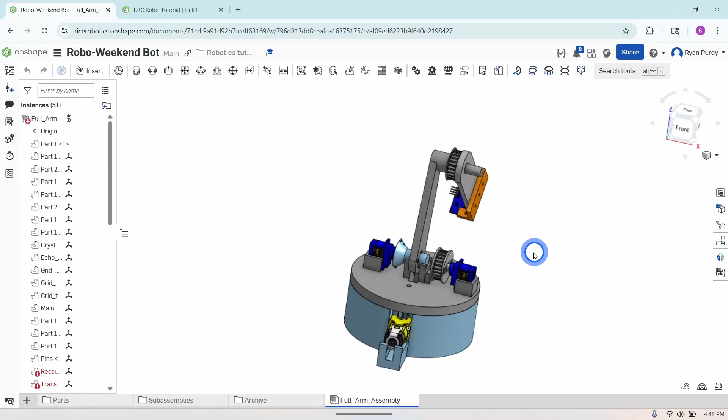So we'll return to our Onshape document, and instead of starting from scratch, we're going to start creating link 2 from the pulley part that we CAD'd earlier. This is because the geometry here is identical. These pulleys have to be the same size to ensure that the rotation is always together between the pulley and the link, so we'll save some time by using the geometry we already created in the pulley part file.

So go to the pulley in the file select, right click, and select duplicate, and this will create a copy of our pulley. Then right click that file to rename it and just call it link 2.

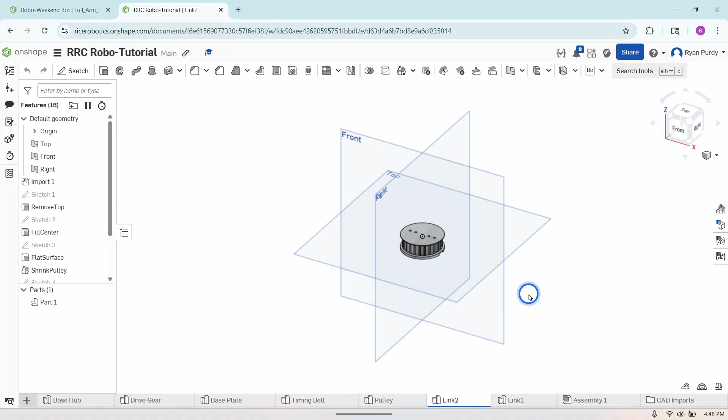So now we have a convenient starting point for our link 2 geometry. There are a few parts we don't need, this servo attachment, for link 2, so we'll need to go into our feature tree and figure out how to get rid of both this servo cutout or servo horn cutout. We also don't need these holes because we won't be mounting this to a servo.

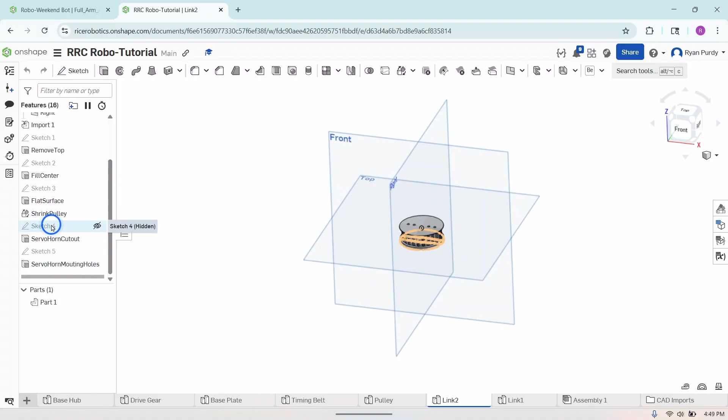Scroll down. Conveniently, we did name our features, so it's very clear to see which ones we need to delete. We need to delete this sketch and the associated feature, which is the horn cutout, and then this sketch and the mounting hole feature. So select all of them, right click, and delete. Now this will be the starting point for our link 2 CAD.

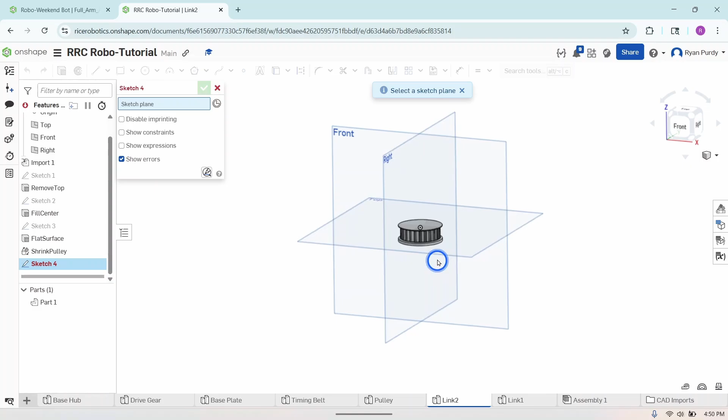Okay, so we'll start adding to this pulley to build our link 2. We're going to start by creating a sketch on the bottom face of this pulley. You'll see one of these faces of the pulley is a little bit thicker, and we'll be doing it on that thicker face. Select that to be the sketch plane, right click, reorient the view.

Now we're going to create some geometry here to make the main body of our second link. You're going to select the Use tool from the toolbar and project this circular edge onto our sketch plane. That will be one part of it, and then the other part's going to be a corner rectangle.

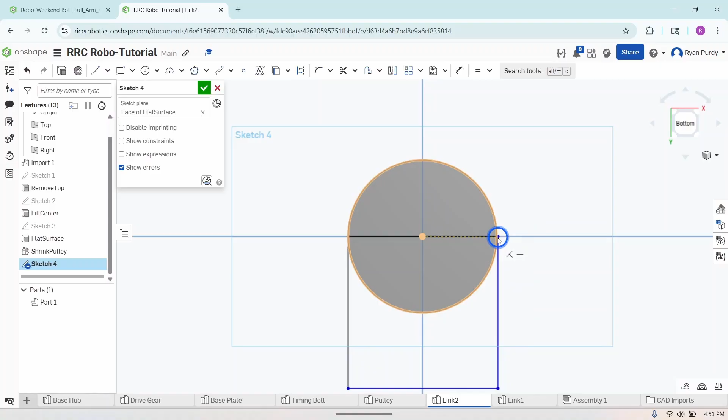Select corner rectangle from the options up here. One of the corners needs to be coincident with the circumference of this circle, and it also needs to be horizontally aligned with the origin. Make sure both of those relations are added. Click to establish the first corner, then drag and place the second corner out here somewhere. Then exit the rectangle tool, and drag this corner so that it is also coincident with the circle. By default, it will be horizontally aligned with the origin.

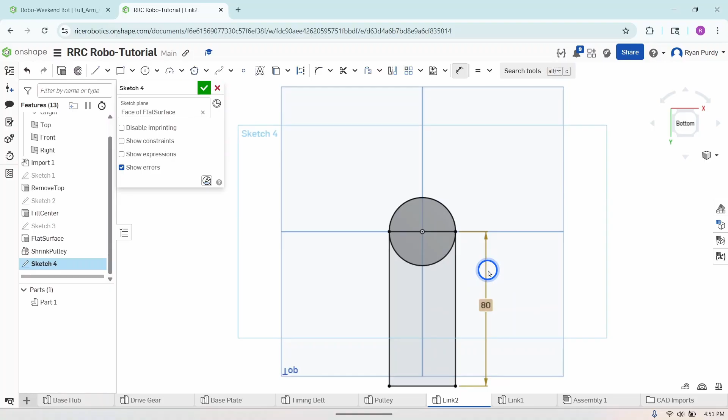That looks good. Now we just need a dimension added to this rectangle so that this line down here will be fully defined. This rectangle needs to be 80 millimeters long, so we'll add a dimension to this edge and say that it will be 80 millimeters. Now this sketch is fully defined. This will form the main body of our second link.

So finalize the sketch, and then we're going to extrude this sketch, adding material 5 millimeters away from the pulley. Specify 5 millimeters, and it adds this body here. That looks right, so hit the green check mark. Go ahead and name that feature.

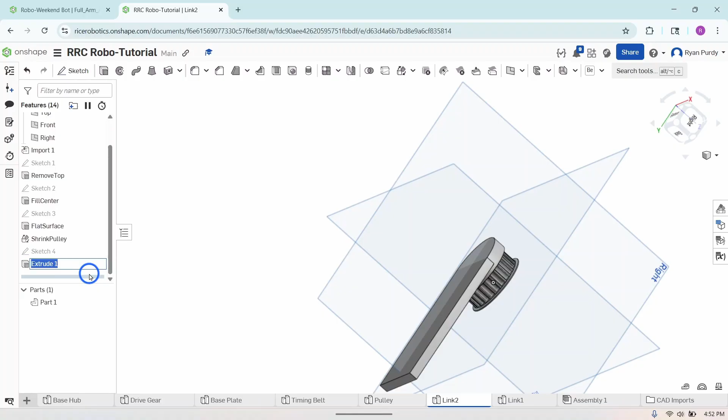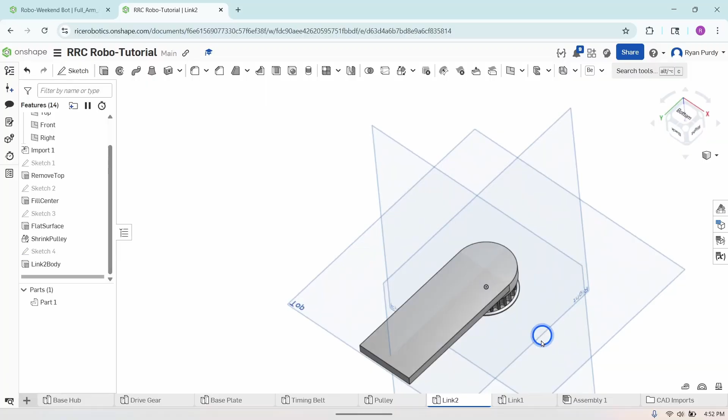Now that we have this main body, we need to add a hole. If you'll remember in link 1, we added a shaft so that link 2 can sit on it and connect to it. So we need to add a hole in link 2 so that it can engage with link 1, a circle that's concentric with this circular edge here and goes all the way through the part.

So we need to create a new sketch on this top plane. Right click to view normal to the sketch plane. We're going to draw a 10 millimeter circle that is concentric with this arc, which in this case just means it's centered at the origin. So draw a circle, use a dimension to specify that its diameter will be 10 millimeters.

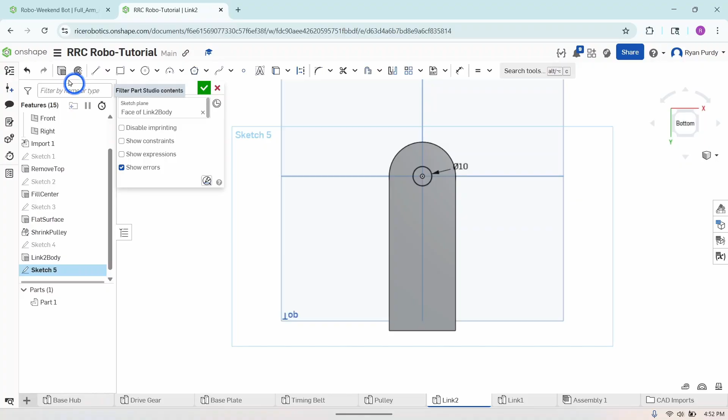Now that's fully defined, and we will extrude it, this time removing material, with a through-all end type because we want to cut through all of the part, both the link 2 body and the pulley itself. Hit the green check mark to finalize that feature. Make sure to name it.

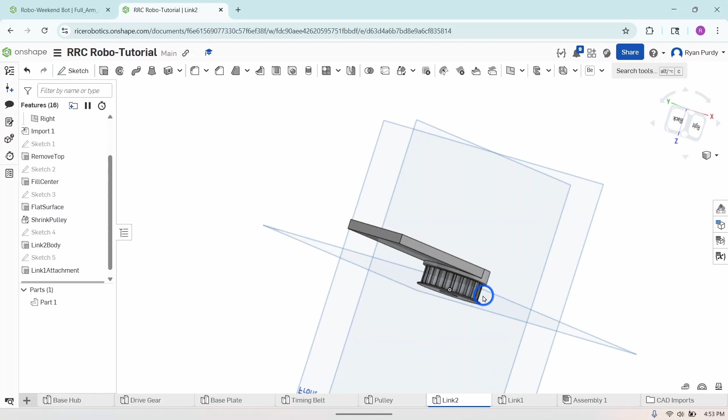So now we only need one more feature to finalize link 2. We need some holes on this end so that we can mount the sensor directly to link 2. To do that, we're going to create a sketch on this top plane of link 2.

Going to reorient our view. Now we're going to start by drawing a construction line. It's going to be horizontal, coincident with both sides of this rectangle. Select the line tool, and make sure that you're drawing for construction.

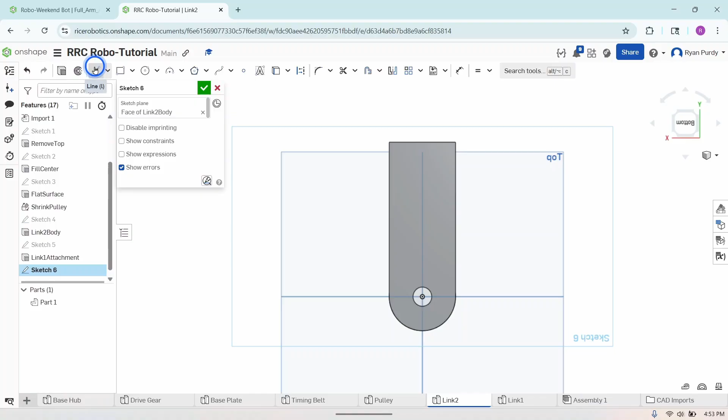Place the first point on this edge, and make sure that you're adding a perpendicular relation, just to ensure it is going to be horizontal. Make the other side coincident with this edge. And then we're going to escape the line tool.

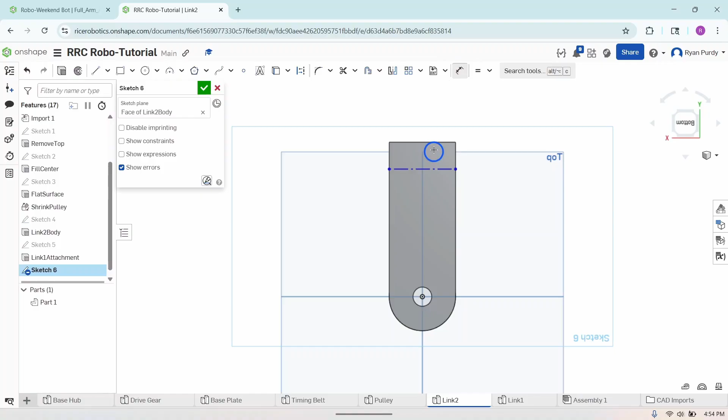To fully define this line, we need to add a dimension between it and the top edge here to specify its position. In this case, we're going to add a dimension here with a value of 7.5 millimeters, and that will properly position it with respect to this edge.

Now we're going to add some circles along this line so we can position the holes properly. We're going to have 3 holes here to mount the sensor to link 2. First we're going to draw a small circle. It's going to be on this line and vertically aligned with the origin, also at the midpoint of this construction line—either relation will work. So draw that circle, add a 3 millimeter dimension.

Now we're going to draw another circle with the same diameter, at any other point on the line. In this case, I'm going to draw it to the left, and I'm going to use this equal relation to make sure these 2 circles always have the same diameter.

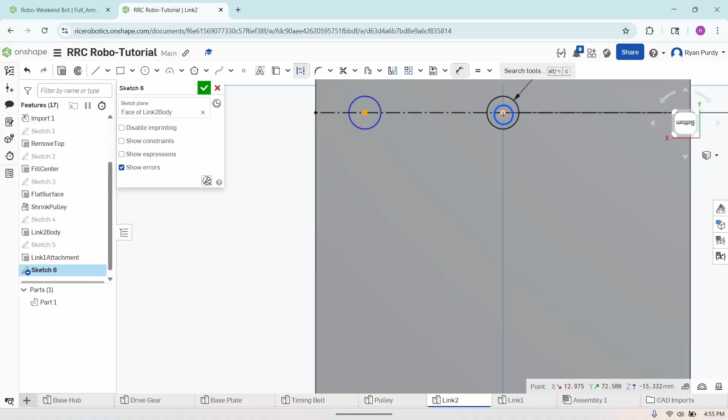Then to fully define this circle, I need to specify the distance between the centers of these 2 circles. So zoom in a little bit, define a dimension between these circles, and it should be 13 millimeters—that's the spacing between those holes.

Finally, we just want another hole the same distance on the other side of link 2. For that, we're just going to use the mirror tool, mirroring this sketch entity about the line made by the plane that divides link 2 in this direction. So select that line, and then select this circle to mirror it.

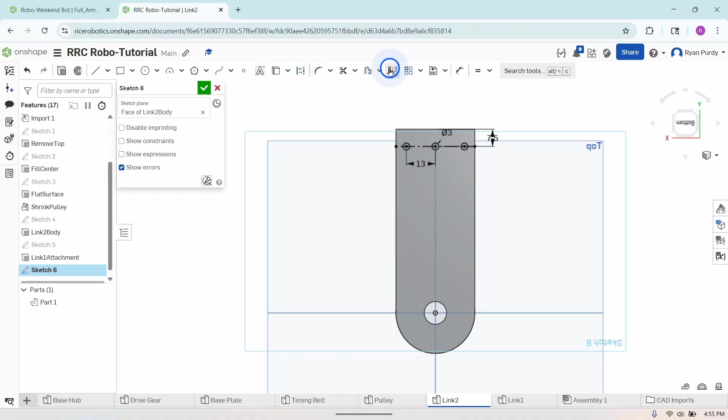Great, so this sketch is now complete. We just need to extrude them and ensure that we have the holes in the proper position, removing material from link 2 with a through-all end type. Finalize that extrude, and now that feature is complete.

As always, make sure to name the feature—just something that you will understand whenever you look back at the part later.

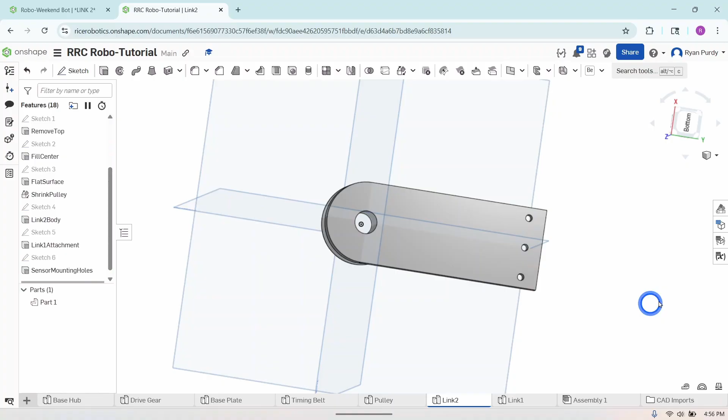Great, now link 2 is complete, so we're well on our way. We have 1 part left before we're finally able to start assembling these parts and building our arm. So thanks for sticking with me this far, and I'll see you in the next video.